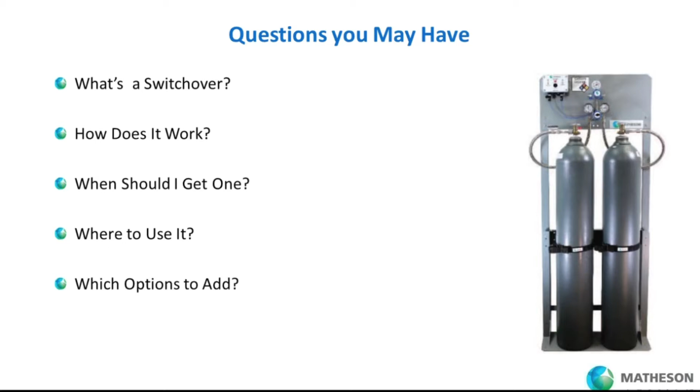What is a switchover? A switchover is a manifold panel made up of regulators and other items that operates as an automatic switchover. As you can see, the picture here shows a two-cylinder switchover in stainless steel. It is a system that provides a continuous, uninterrupted supply of gas. I like to stress that it is an uninterrupted supply of gas. It's the best insurance that you don't run out of gas. It's based on pressure differential technology. It's ideal for high or low purity gas delivery, available in brass or stainless steel materials.

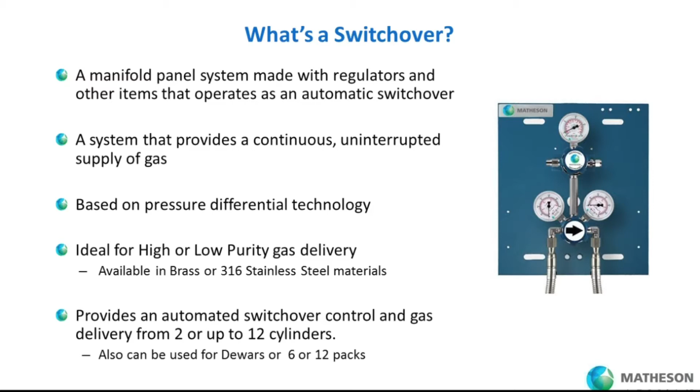It provides automatic switchover control and gas delivery from 2, which shows right here on the picture of the panel on the right, up to 12 cylinders. As well, this can be used for dewars or 6 or 12 packs.

How does a switchover work? Well, on the panel right here, you see the arrow is pointing to the right, making it the primary side. It is set at a specific delivery pressure, either 175 or 225 psig. The left bank on the other side is fixed at our nominal 200 psig setting. When the right side delivery gas from the cylinder bank drops below 200 psig, the left side automatically takes over since it's waiting to deliver gas at 200 psig. When the right side cylinder is virtually empty, the left side is now delivering gas.

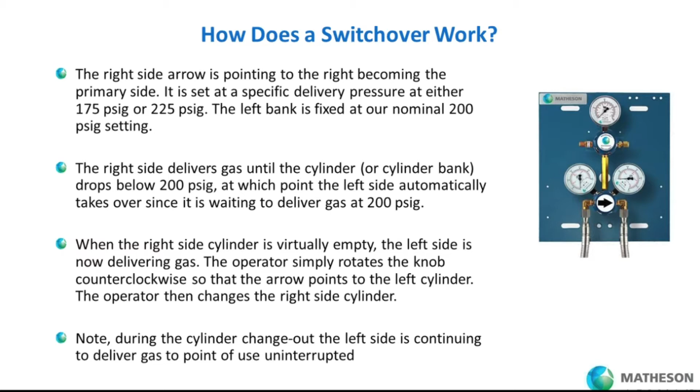The operator then simply rotates the knob counterclockwise so that the arrow points to the left cylinder, making that side the primary. The operator then changes the right side cylinder. And note that during the cylinder change out, the left side continues delivering the gas to the point of use, again, uninterrupted.

When should you use a switchover? Again, as we stress, when you need a continuous, uninterrupted supply of gas, whether from cylinders, dewars, or packs. It is your best insurance policy not to run out of gas during the process. It controls the gas delivery from cylinders within a centralized distribution system, providing a safer and efficient gas delivery to the point of use. Also, when one needs to monitor remotely or locally the emptying of cylinders to get notification.

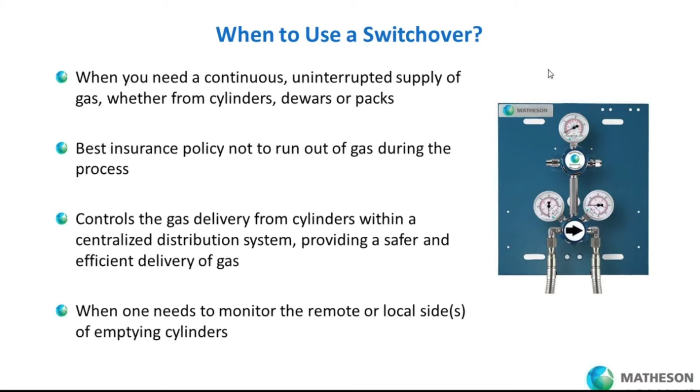Where are switchovers typically used? Again, applications that may benefit from an uninterrupted supply of gas: research analytical labs, heat treating furnaces, additive metal 3D printing equipment, and other applications that require an uninterrupted supply of gas throughout the process.

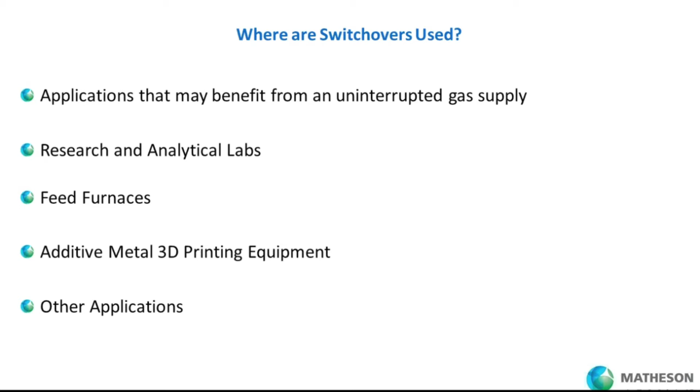Let's look at the switchover system. The basic specifications: the panel dimension, as shown right here, is 12 by 14. The materials, as mentioned before, are available in brass or stainless steel. You need to know the gas type to be used, so you have the CGA connections at each cylinder. The standard system has a maximum flow of 3 standard cubic feet per minute of nitrogen.

The configuration, again, as mentioned before, is set up with a 200 psig plus or minus 25 psi switchover pressure. The delivery pressure outlet that comes out on this side has options of 0 to 30, 0 to 100, 0 to 150. The 0 to 100 is the most common one that is used for many applications.

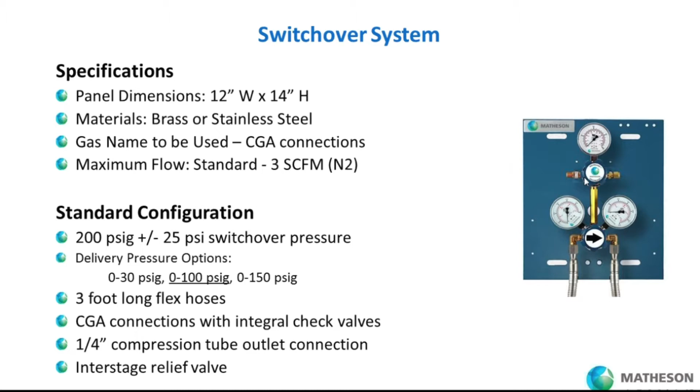Each connection has 3-foot flex hoses that are connected to the cylinders as needed. The outlet connection, as shown here, is a 1/4-inch compression, and here on this side there is an interstage relief valve.

Additional options that are available: instead of 3-foot flex hoses, we can have a 6-foot flex hose or even longer. Typically, 6 foot is sufficient for dewars or 6 or 12 packs when they're connected. An NFPA label is very important to have for ready identification of the gas service. Typically, it is placed here on one of the panels.

High pressure vent valves, as shown in the panel left and right, enable the user to maintain optimum purity after cylinder changes. Basically, it prevents moisture from getting in when you change the cylinders. A low pressure isolation valve can be added at the outlet for temporary system isolation of the complete system.

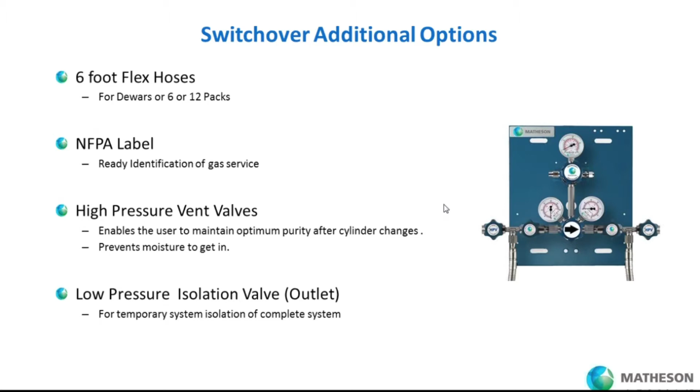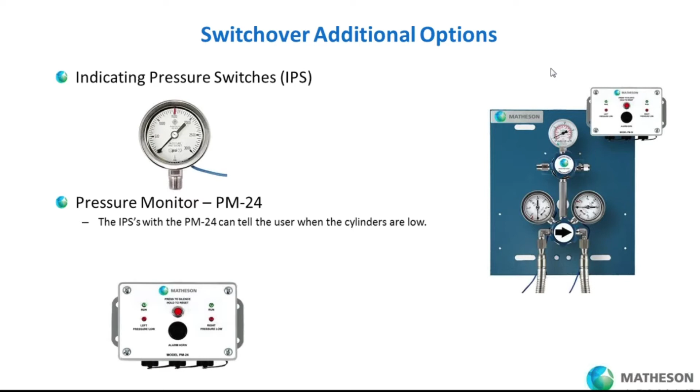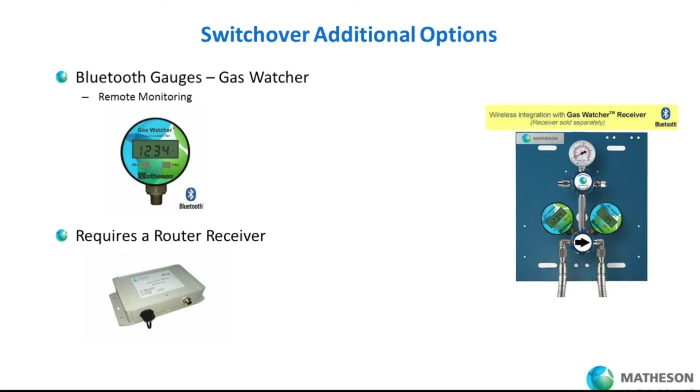The standard outlet fitting, as mentioned before, is a 1/4-inch outlet fitting. Another outlet fitting available when dealing with a high flow system, which we'll talk about further, is a 1/2 inch for a system higher than 3 standard cubic feet per minute of nitrogen.

The manifold piping with station valves: what we've shown so far is 1 by 1, but we can provide up to 12 cylinders, 6 by 6. So it can be 5 by 5, 4 by 4, 3 by 3, 2 by 2, and 1 by 1, which we're showing in our examples. This can also be tied into 6 or 12 packs or to dewars.

You can also add to the system an emergency shutoff valve, an ESO. Usually this ties in for safety for flammable and corrosive gases, paired with a gas detection sensor and a controller. And sometimes the whole system can be added in a gas cabinet, which we'll discuss as one of the options that we have available.

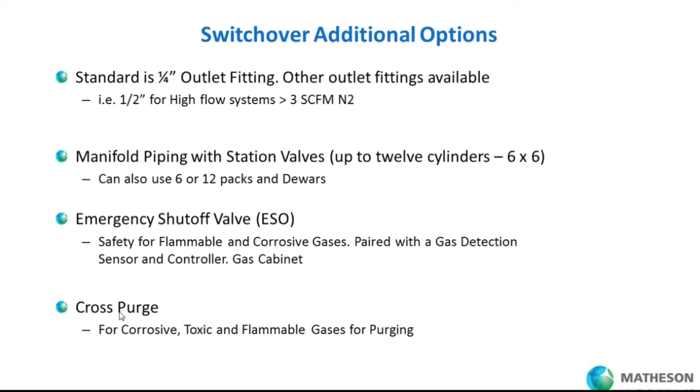A cross purge for corrosive, toxic, or flammable gases when you want to do purging. So the cross purge can be added to the panel and to the system.

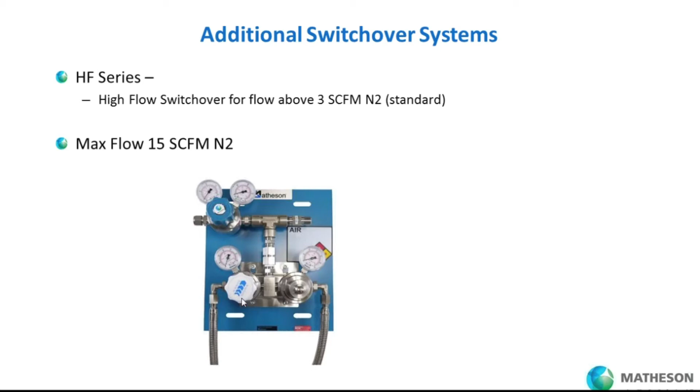An additional system, as I mentioned, when you go to a high flow switchover system above 3 standard cubic feet per minute, which is our standard, we call the HF series, with maximum flow up to 15 SCFM of nitrogen. Basically, it's the same system as you see in the picture, the same configuration, except there are different regulators and materials for high flow performance.

The LPX series is for low pressure gas supply below 400 psig. When you have liquefied gases with low vapor pressures, for example propane, it requires a different type of switchover system, which we call the LPX. Same type of system, except there is different equipment and regulators that operate for this low vapor pressure type of gases.

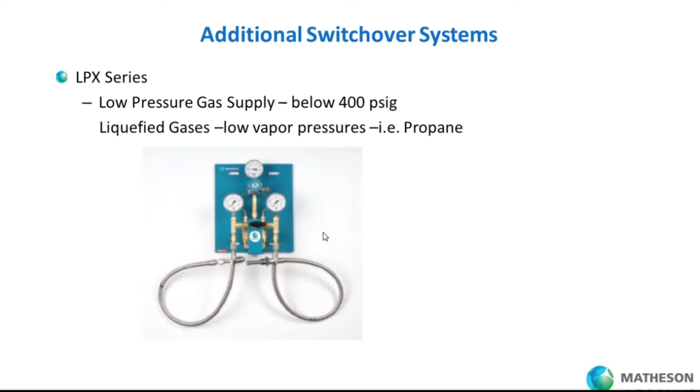You can also tie the switchover system with what we call a 3DPro switchover panel. We add a pure gas purifier panel that ties in together and provides the gas at 6.0 purity, removing oxygen, moisture, and hydrocarbons.

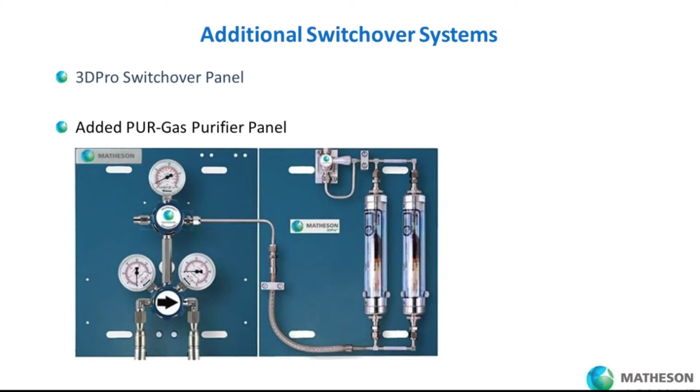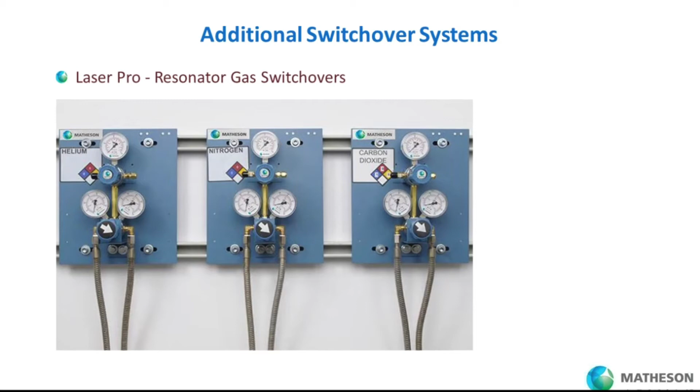When you have Laser Pro for high flow, you have resonator gas switchover systems. Here you have helium, nitrogen, carbon dioxide tied in, again, providing uninterrupted supply of flow of the gas that is needed for the application. As mentioned before, you can tie it in a 1x1 panel into a cabinet for flammable and corrosive gases, to meet the fire and safety codes of NFPA 55.

You can also add, as mentioned before, an IPS pressure switch and a pressure monitor, PM24. Typically, this is mounted on top of the cabinet and shows notification when one side is empty for alarm notification. You can also add to the panel an emergency shut-off valve to each side. Also a gas detection sensor and transmitter, which is mounted and wired inside the cabinet, and a controller that ties in the ESO and the gas sensor altogether. The GSM12 controller usually is mounted on top of the cabinet as well.

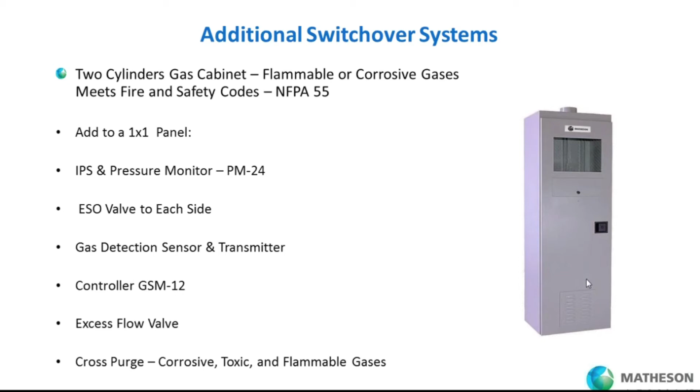You can also add an excess flow valve, depending on the gas and application, or a cross for purging, if you want to do purging for corrosive and toxic or even flammable gases, all encompassing a gas cabinet that we provide as a complete system.

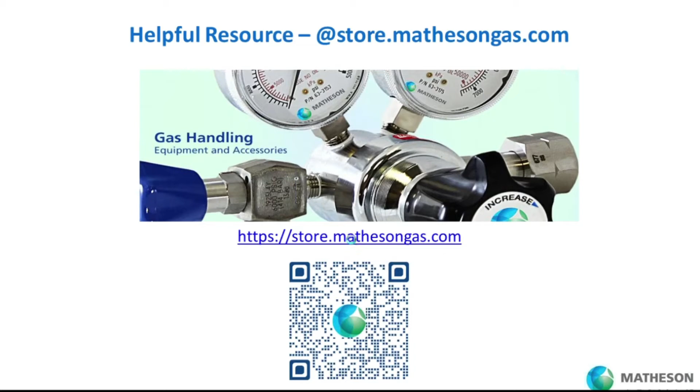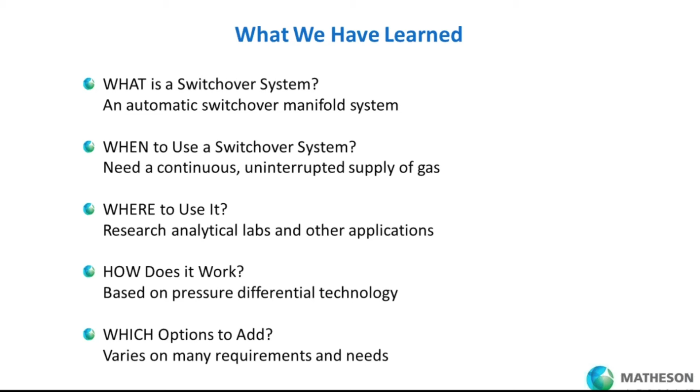I will turn to some of our panel and have some of the questions that have been sent before. And feel free to also text, and our Bill Staples, our engineering manager, will be getting to some of the questions, and the answers can be helpful for the individual that sent them or to everybody else that is listening and wants to learn more about switchovers.

Okay, Bill, are you there? Yes. Yeah, go ahead, Paulo.

Yes, Bill. Here's a question I got from Jay. He's saying here, using a high purity hydrogen gas, I want to purge the line on the tank that I just replaced before reintroducing it to the process. I do this because I do not want any air, oxygen, or nitrogen to get into the process. Do I have an option for that? Can I run a tube to the vent that purges outside? Also, do you recommend something to reduce the noise of the purge? I have seen a back pressure regulator used for that, but not sure if that is the best. Appreciate the inputs. Thank you.

Thank you, Jay, for the question. You would want to use the high pressure vent valve option for purging with a process gas. The vent valve has a 1/4-inch female pipe connection, which makes it easy to pipe to a vent line. The vent valve is a full turn diaphragm valve, and you could open it just a slight amount to control the venting. Some customers add an orifice to the vent valve, which will slow down the venting process. A back pressure regulator will restrict the flow and leave a back pressure on the system, but it seems to be an expensive way to restrict the flow.